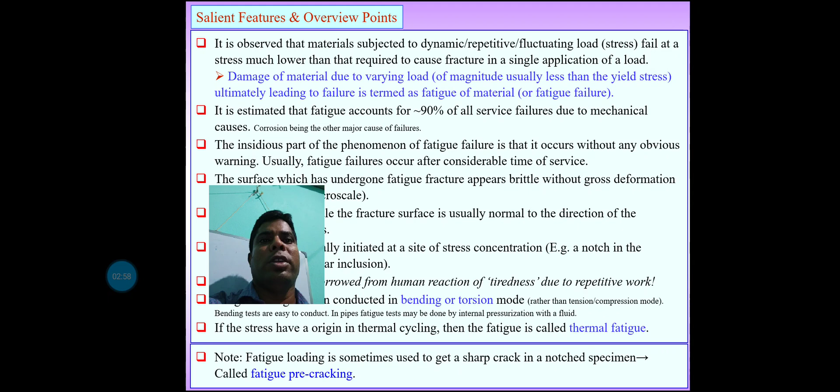So, salient features and overview of fatigue. The first important point is that it is observed that materials subjected to dynamic, repetitive, or fluctuating loads may fail at a stress level much lower than that required to cause fracture in a single application of load.

In some cases, damage to a material due to varying load of magnitude usually less than the yield stress, ultimately leading to failure, is termed as fatigue of the material, or specifically fatigue failure. It is estimated that fatigue accounts for 90% of all service failures due to mechanical causes, more than corrosion or other factors.

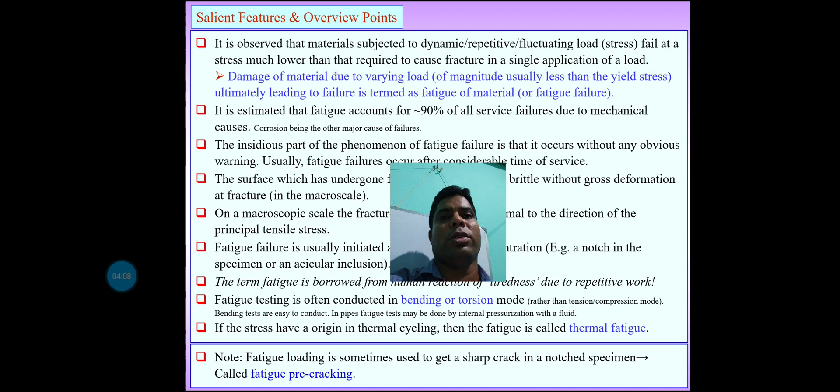The next point is that the insidious part of the fatigue failure phenomenon is that it occurs without any obvious warning. Usually fatigue failure occurs after considerable time of service. The surface which has undergone fatigue fracture appears brittle, without gross deformation at fracture. If we see the gross deformation at a macro scale level, the fracture surface is usually normal to the direction of the principal tensile stress.

The next point: fatigue failure is usually initiated at a site of stress concentration, meaning a notch in the specimen or an acicular inclusion. The term fatigue is borrowed from the human reaction of tiredness, since we repeatedly use this word fatigue to mean tiredness due to repeated work.

When work done is more than the tolerance limit, one can feel fatigue, that is, tiredness. Fatigue testing is often conducted in bending or torsion mode. And if the stress has its origin in thermal cycling, the fatigue is called thermal fatigue.

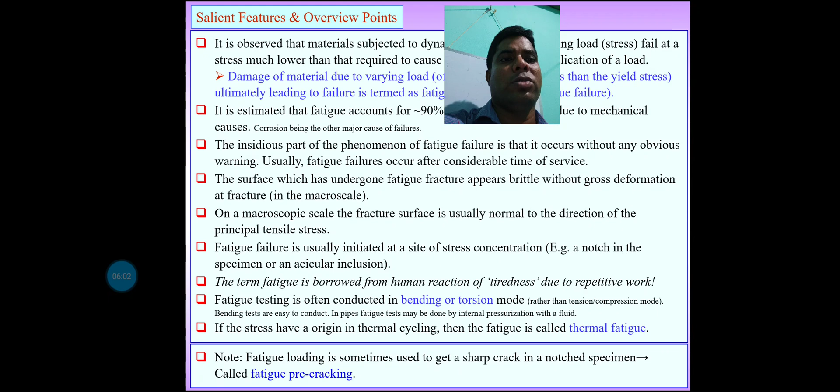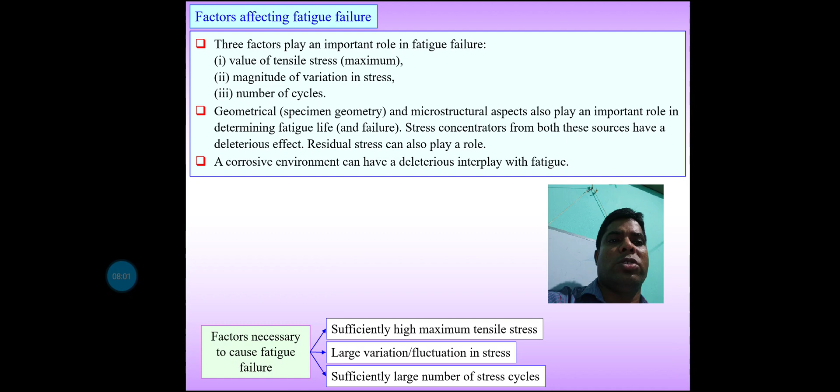Now, next point, a corrosive environment can have a deleterious interplay with fatigue. Factors necessary to cause fatigue failure: number one, sufficiently high maximum tensile stress. Number two, large variation or fluctuation in stress. And number three, sufficiently large number of stress cycles.

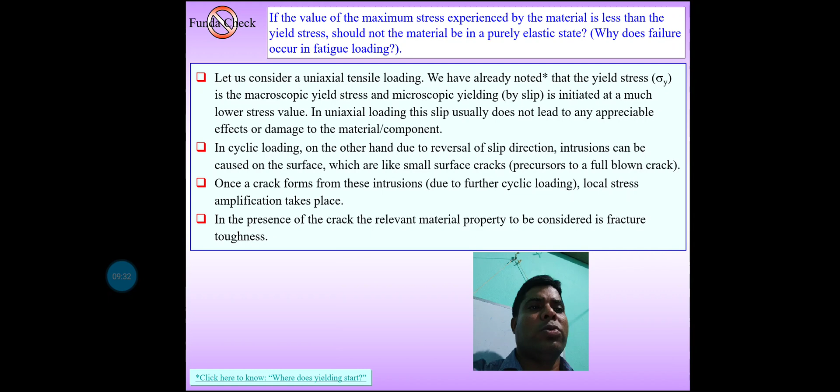Number two, in cyclic loading, on the other hand, due to reversal of slip direction, intrusions can be caused on the surface, which are like small surface cracks, precursors to the full-blown crack. And once a crack forms from this intrusion, local stress amplification takes place. In the presence of the crack, the relevant material property that should be considered is fracture toughness.

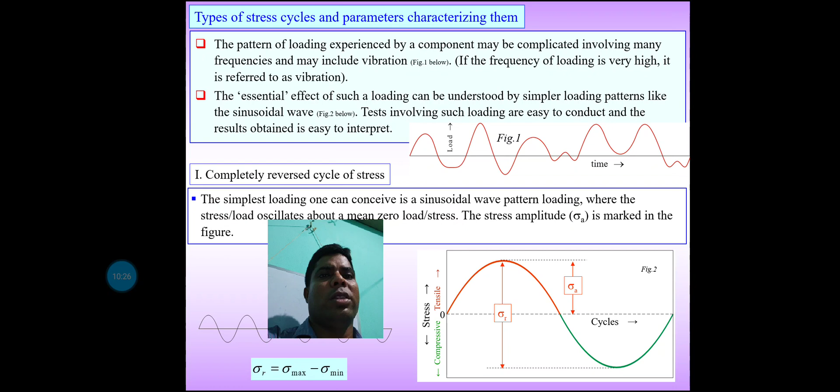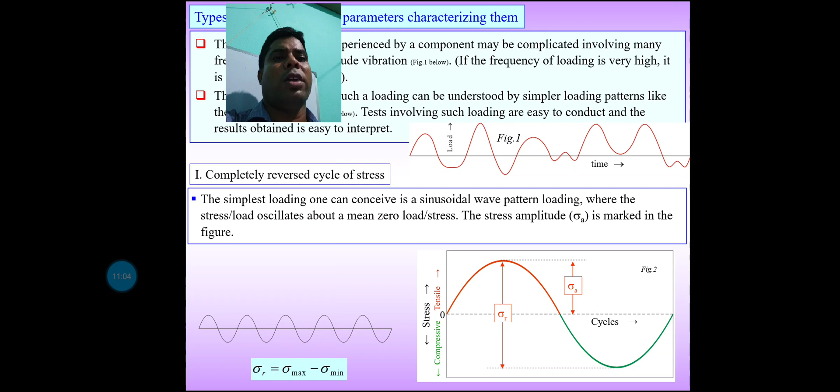Now next, tests involving such loading are easy to conduct and the results obtained are easy to interpret. The first one is the completely reversed stress cycle. In this case, the simplest loading we can conceive is a sinusoidal wave pattern where the stress oscillates about a mean zero stress, and the stress amplitude is marked in the figure. So in the figure, the stress range sigma r is equal to sigma max minus sigma min.

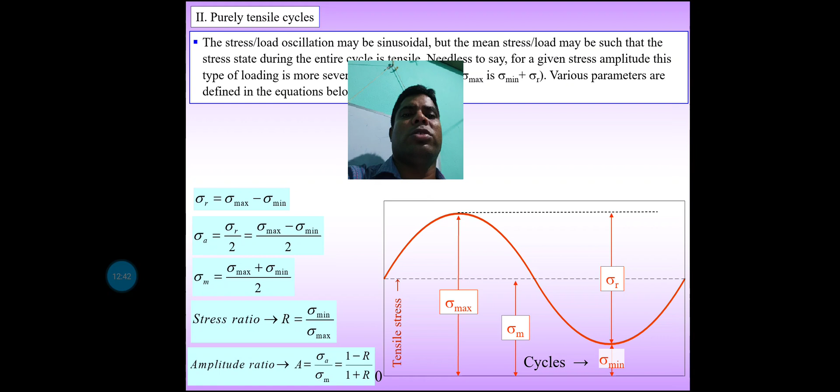Sigma a, the stress amplitude, is equal to sigma r by 2, that means sigma max minus sigma min by 2. Here mean means M-E-A-N, mean. Sigma mean is equal to sigma maximum plus sigma minimum by 2. And the stress ratio R is equal to sigma minimum by sigma maximum. Now the amplitude ratio A is equal to sigma a by sigma m, which relates to 1 minus R over 1 plus R.

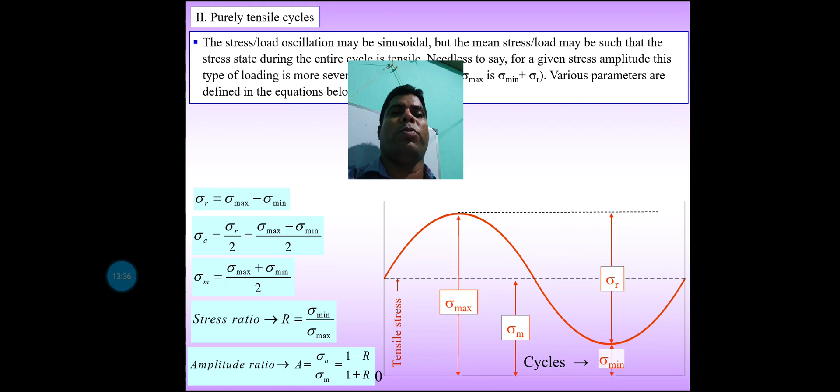So these are the 5 equations, very important for any type of load-stress relation, where the stress levels are defined and you have to find the mean stress, amplitude, stress range, amplitude ratio or stress ratio. These 5 points are very important to calculate any type of fatigue-related problem.

A random stress cycle. The stress or load oscillation may be sinusoidal, but the mean stress may be such that the stress state during the entire cycle is tensile.

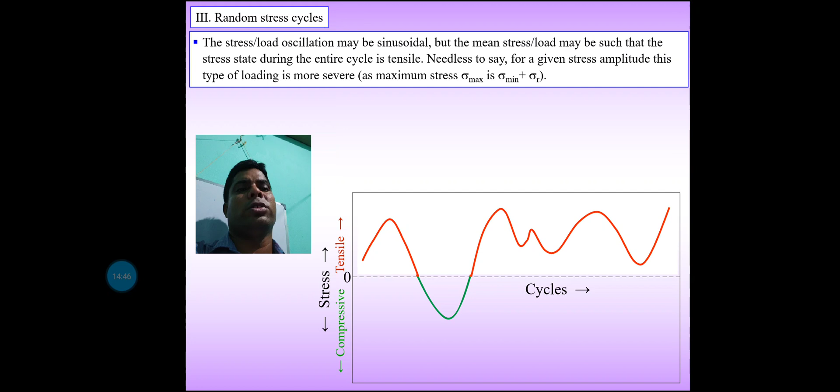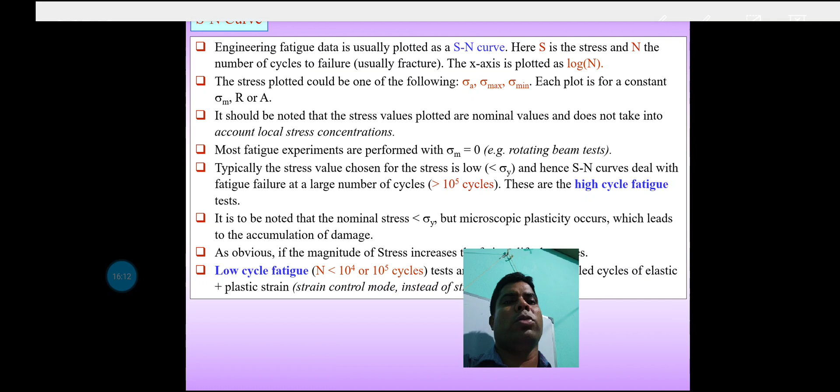Most fatigue experiments are performed with sigma M equal to 0. Typically, the stress value chosen is low, that means less than the sigma yield value. So the SN curve deals with fatigue failure at a large number of cycles, that means the number of cycles may be higher than 10 to the 5 cycles. So these are high cycle fatigue tests. It should also be noted that the nominal stress is less than sigma yield and microscopic plasticity occurs, which leads to the accumulation of damage.

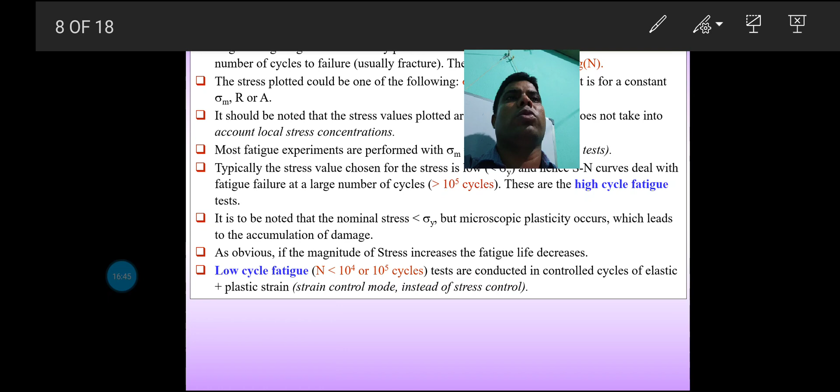In low cycle fatigue, N is less than 10 to the power 4 or 10 to the power 5 cycles. That test is conducted in controlled cycles of elastic plus plastic strain, which is actually strain control mode instead of stress control mode. And in these cases, broadly, the SN curve can be differentiated into two classes of material: one is ductile material and another is brittle material, and the fatigue limit, or endurance limit, can be different for different materials.

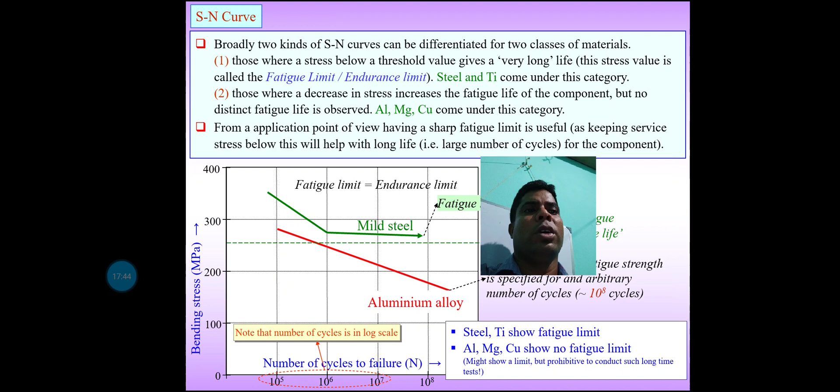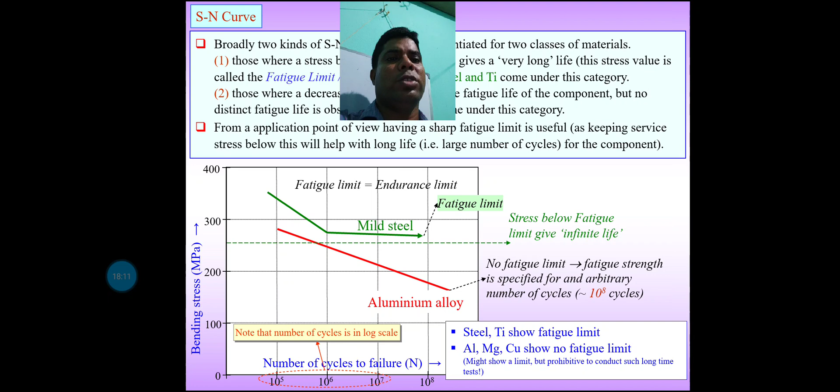If I use a ferrous material, the SN curve varies just like a straight line curve, and for non-ferrous materials like aluminium, magnesium, copper, etc., another type of curve is created. Now, from an application point of view, having a sharp fatigue limit is useful, and keeping the service stress below it helps give a long life. Here the indications are there: fatigue limit is equal to endurance limit, the top green color indication is mild steel, and red color is the aluminum alloy, and the number of cycles to failure ranges from 10 to the power 5 to 10 to the power 7 cycles.

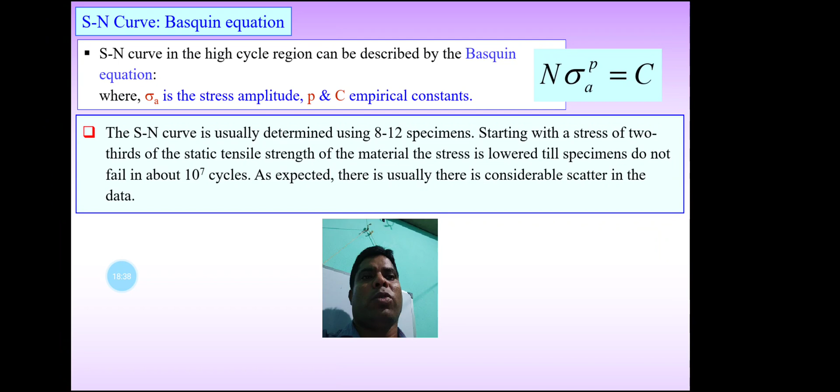SN curve Basquin equation: N into sigma A to the power P is equal to C, where sigma A is the stress amplitude, and P and C are empirical constants. This is one type of equation, that means one type of problem, which is to calculate the fatigue stress limit versus number of cycles. And so these are typical examples of problems related to fatigue failure.